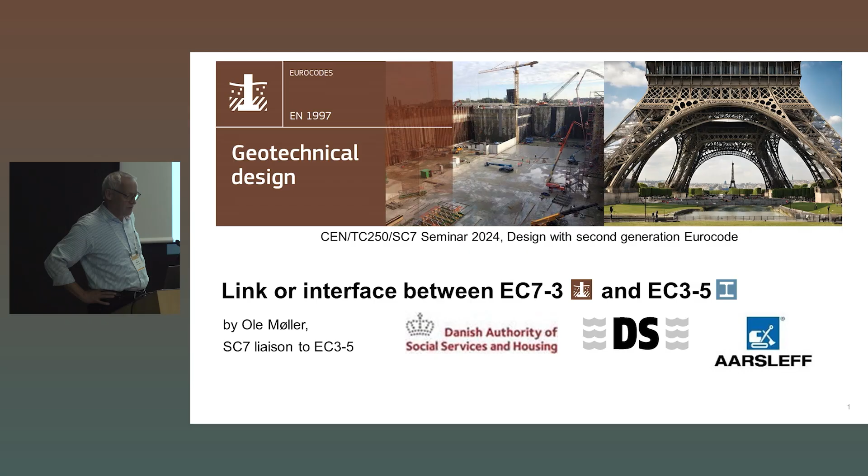Well, today's agenda, there are 4 points. I'll talk about the verification of rotation of sheet piles, and to me, a retaining structure is not finished. The design is not over until you have told the production what profile with what steel grade to use.

Similarly, if you do a pile design, you have to tell what is the concrete, what is the reinforcement in this pile, especially when we talk about piles in soft soils where there's an interaction between the soil and the structure, a buckling issue.

So you have to be involved with the material as well as the chemical matters. I'll speak a little bit about the corrosion issue, and the buckling is just mentioned here that the partly embedded piles, they are covered by Eurocode 3 Part 5. Partly embedded means that it is mainly subjected to bending, whereas the fully embedded piles are mostly subjected to compression. Buckling is not an issue for tension piles, as you probably know.

Lately we have these - well, I don't know the English word, we call it in Denmark Siamese twins. They're born in one piece and they were split into two. The rock bolts and the soil nails are now in 2 separate chapters.

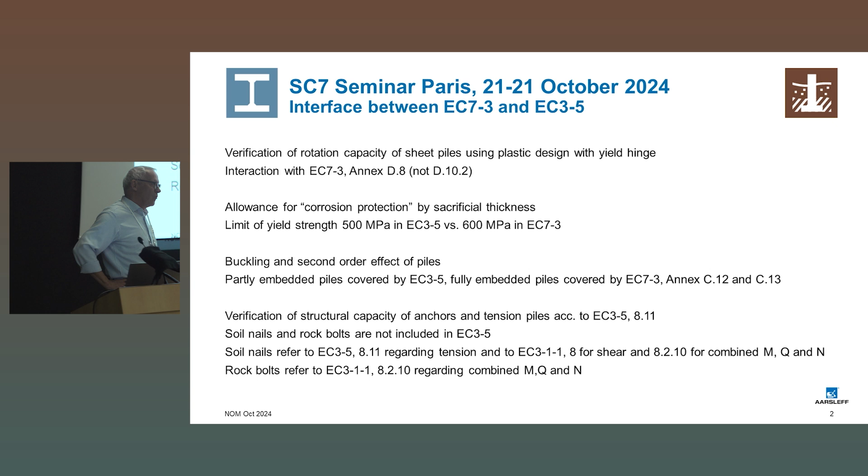And the rock bolts and soil nails are not included in Eurocode 3 Part 5. The steel people didn't want them. They are orphans. They're not part of a piling or retaining structure. So that was the main reason for the steel people not to involve them.

But that doesn't mean that the working groups in Eurocode 7 didn't have to refer to somewhere for how to document the steel. So Natalia and the group referred to Eurocode 3 Part 5 regarding the capacity of anchors and tension piles, to find the equations and rules how to do that. And I find it will work.

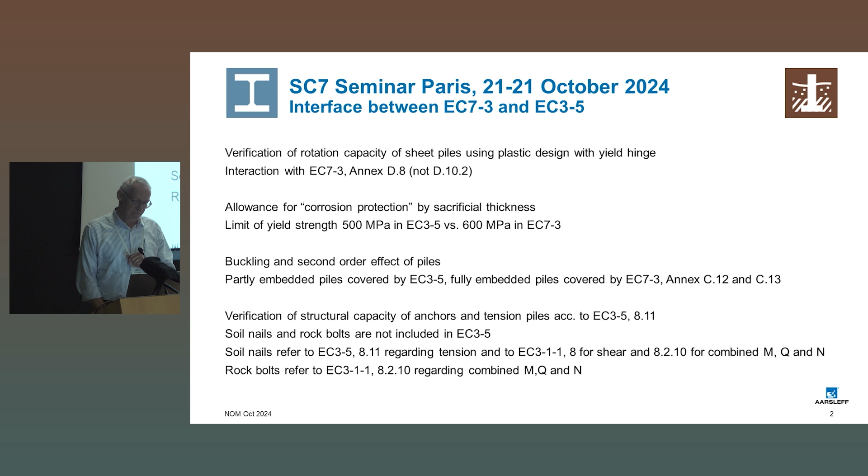Well, back to this verification matter. It's about rotation capacity, and it's the extra rotation beyond the elastic capacity which is interesting. So it's termed the total rotation minus the elastic rotation. The left-hand side concerns the geotechnical part, and the right-hand side concerns the structural part. But this verification principle is valid for any kind of retaining wall calculation.

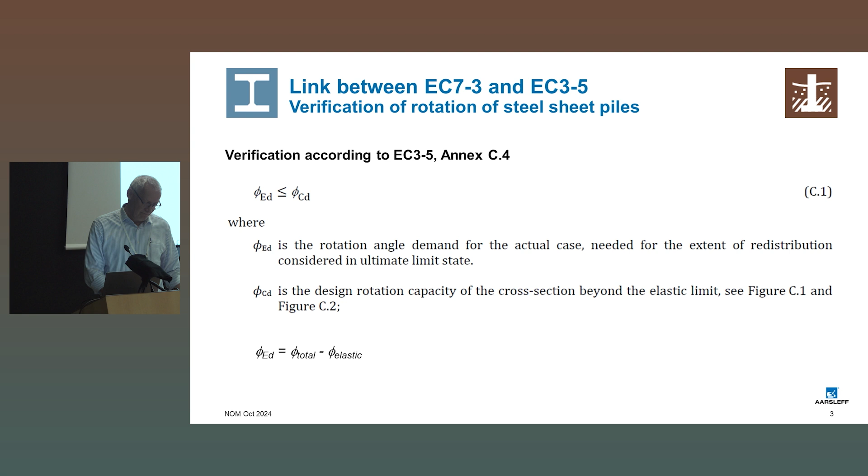Can I point with this? Okay, no, this is not a gamma, it's a Y for yield. It is the elastic rotation, considering the section to be pure elastic up to the semi-plastic limit. It's a trick - it's an approximation, but it makes the calculation easier.

And you see phi CD, that is the plastic capacity of the cross-section. So we have the elastic and the plastic. Reduction factor rho C depends on the relative slenderness of the flanges of the sheet pile profile, and it's experimentally determined.

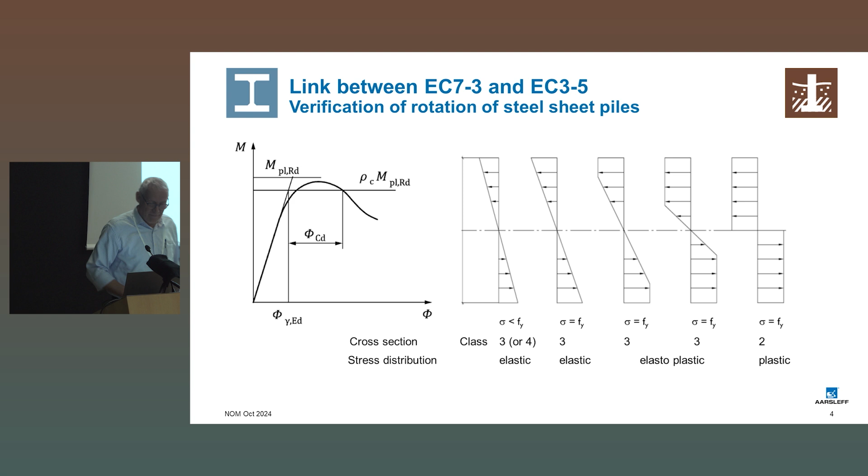You can also use a measure of how plastic it could be. We see here, cross section class 2 is pure plastic. Cross section 4 or 3 is pure elastic. But cross section 3 is actually everything else between pure plastic and pure elastic, and that's a trick to utilize. It's quite obvious that this profile here has rotated more than this here. That's the idea.

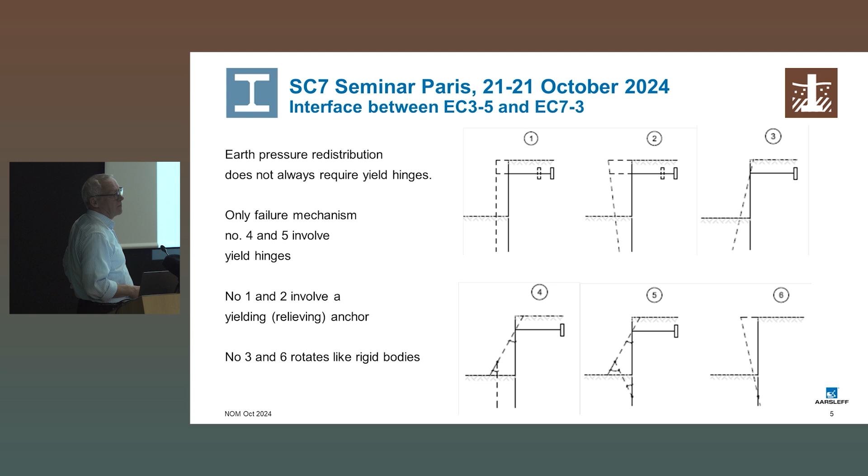Well, I'm talking about the LEM calculations - that's the limit equilibrium method, which anticipates pure active or passive earth pressure distribution. There may be an earth pressure redistribution, even if there's no yield hinge. Remember that a yield hinge is a hinge, but with full bending capacity.

But still, there might be a pressure jump. In number 1 and 2, it is the anchor, the steel, which yields, and the passive pressure in front of the dead man, or the concrete plate, which yields. And by this, allows for active and passive pressure to mobilize.

It's only in number 4 and 5 we actually have 1 yield hinge, and here maybe 2. Here it's rotating about the fixed anchor.

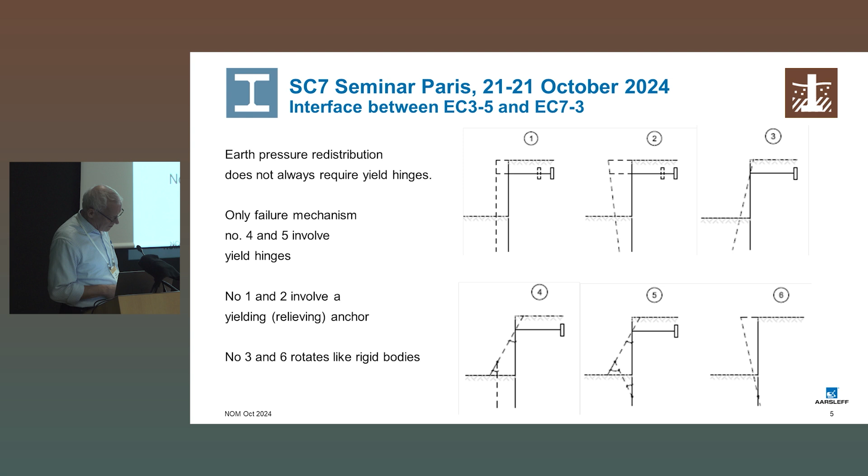The necessary rotation depends on the necessary displacement to mobilize plastic earth pressure. The question is how much displacement and rotation is needed. And here we have some guidance from Eurocode 7 Part 3.

The annex allows for national practice, but typically the mobilization - this ratio of movement compared to embedment depth - should be between 0.1 and 0.23% for the active pressure and 1 to 5% for the passive pressure. Typically, you need 10 times more displacement to mobilize passive pressure compared to the active pressure. It is quite recognized.

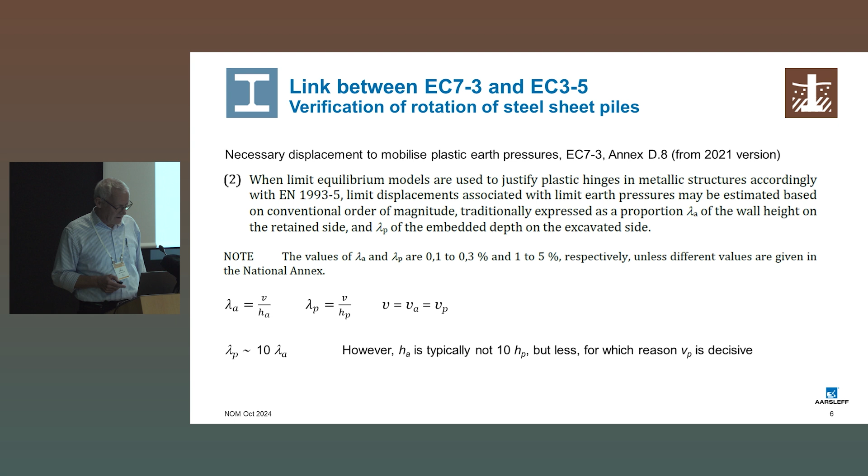Try to show it here. We have different wall heights. Of course, it's the same displacement, but they are giving different rates of displacement compared to the wall height.

But if we believe that the rate to mobilize the passive pressure is 10 times more than to mobilize the active pressure, well, then this lambda p will be most critical if the embedment is higher than 10% of the total height, which is very likely. So it's very often the passive side which is decisive.

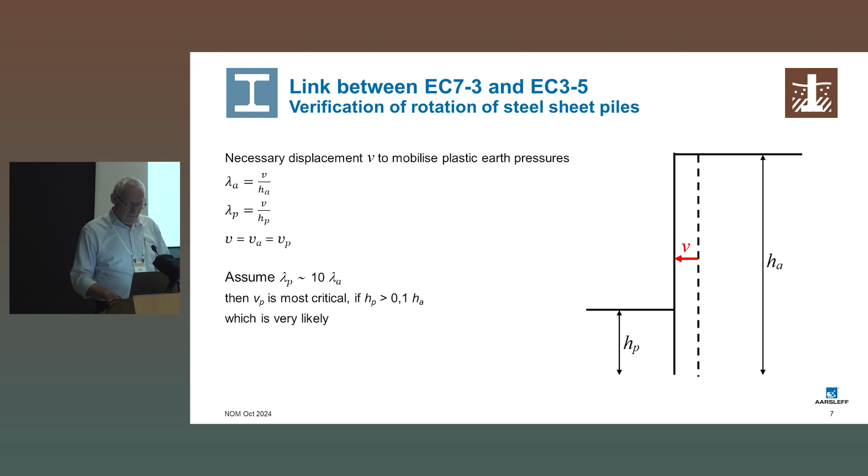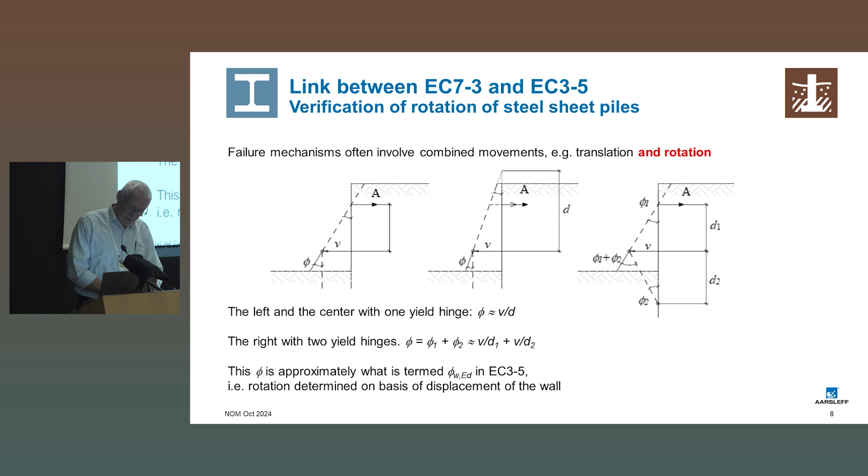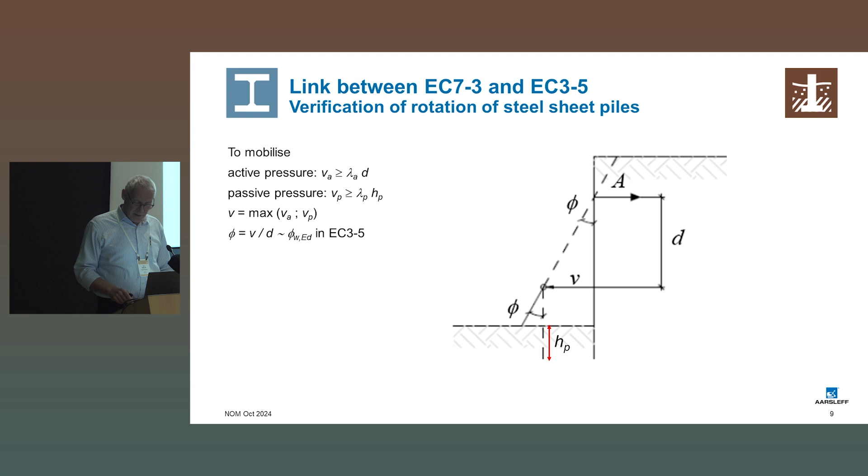Rotation, termed here, is typically, practically very close to the deformation divided by the height. This is what is termed phi WED in Eurocode 3.5. I'll show it on the next slide as well. Maybe I should just show the next slide, so you can compare it to what is stated in Eurocode 3.5.

These equations are stated in Eurocode 3.5, from C.4. You see that W1 is actually the displacement where the bending moment is 0. Same as W3, whereas W2 is the maximum displacement.

That's very close to... I made different calculations. It seems that if you compare it, if you take W1 as the deflection where the anchor point is, then that is 0. That's easier, and you get a small deviation, but it's very insignificant. So it's very easy to do so.

The formula for the elastic rotation is the exact solution for a simply supported beam with a uniform load, taken as an approximation for a sheet pile wall. But it's fairly good even if the load is triangular. It seems to get a very good result to use that.

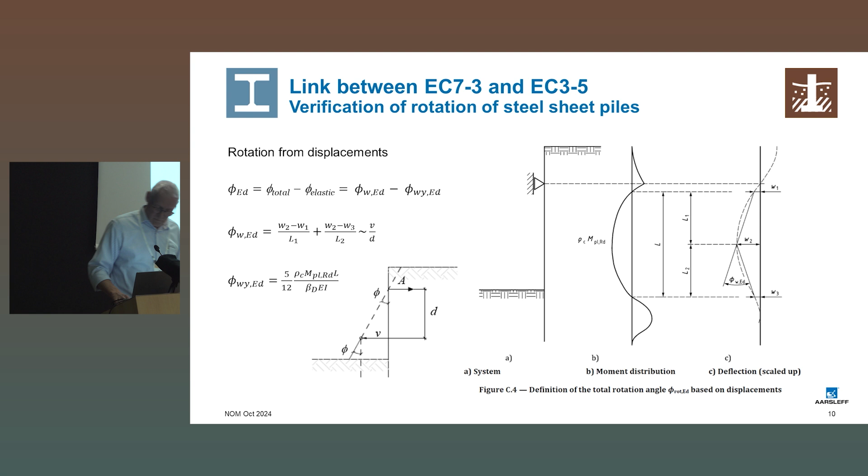I have to go back a little to explain the cross-section classes. This is a table from Eurocode 3.5, table 7.2. They have defined a kind of relative slenderness: the width of the flanges divided by the thickness of the flanges, weighted by a factor taking into consideration the yield stress of the steel compared to the minimum yield stress. So the higher the strength of steel, the higher the relative slenderness, and the more likelihood of buckling.

So when the pile buckles, it is the compression flange that buckles. Therefore, it's quite logical to use the term bf, the flange width divided by the thickness of the flange, as a measure of this.

For class 2 sections, they can be utilized to 100% plastic resistance. For class 3 sections, they can be used to 100% elastic, but anything between 60 and 35 is actually also class 3, and there we have the partial use of the plastic resistance. For U-piles, it's between 49 and 35.

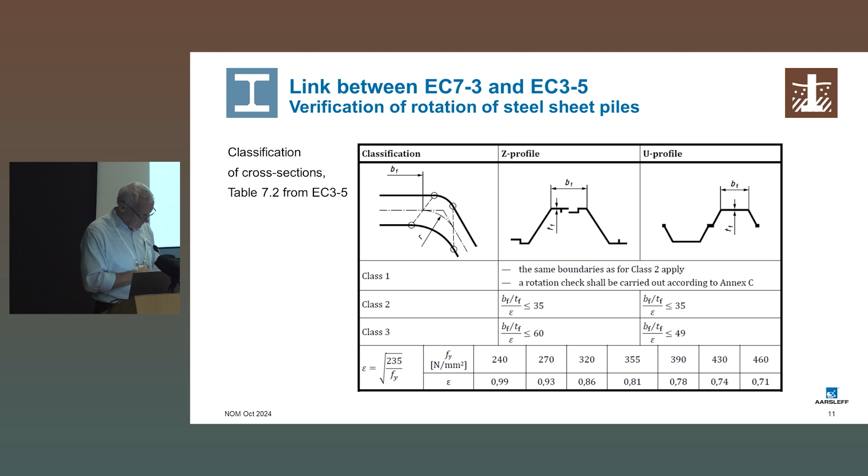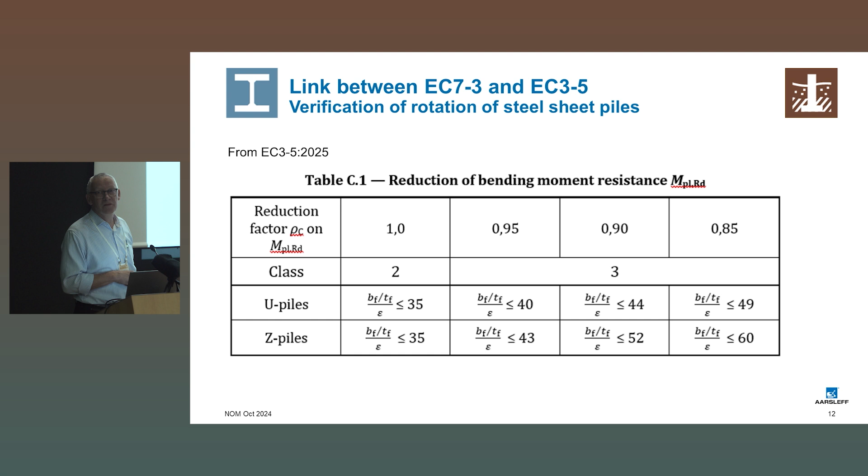Between these limits of 35, 60 and 49, U and Z pile bending tests have been carried out to determine this reduction factor. It is between 1.0 of course and 0.85. If you take a long row of sheet piles and compare the plastic modulus with the elastic modulus, it's very close to 0.85, so it's not a coincidence that this is the minimum value.

So if it's 0.85, that corresponds to a pure elastic cross-section.

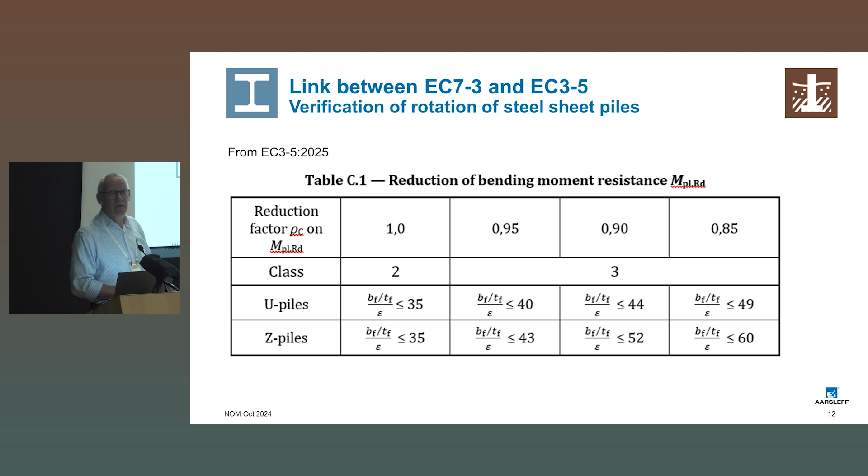This is just something from the background development of Eurocode 3.5 regarding this classification and also determination of the rotation capacity of the piles. It was carried out by subcommittee 3 and working group A, where I took part as a liaison officer. The people involved were Cecil Prim from ArcelorMittal, Dirk-Jan Peters from Royal HaskoningDHV, Colin Jacobs from Anker Schröder in the UK, and also a student, Alexander Enders from the Technical University in Stuttgart.

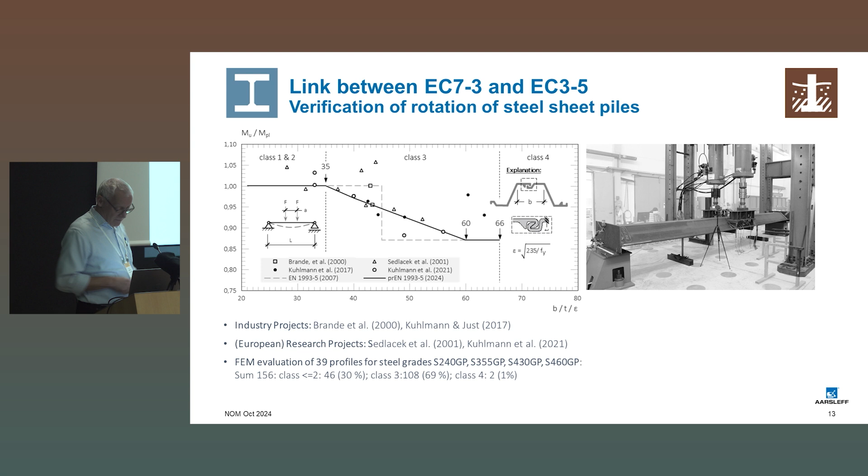The work of the research group led to diagrams to determine this rotation capacity from a given slenderness ratio, which I'll show you on the next slide. These diagrams are actually what is written in the current Eurocode 3.5, maybe with slightly changed limits, but it's the same structure of the figures.

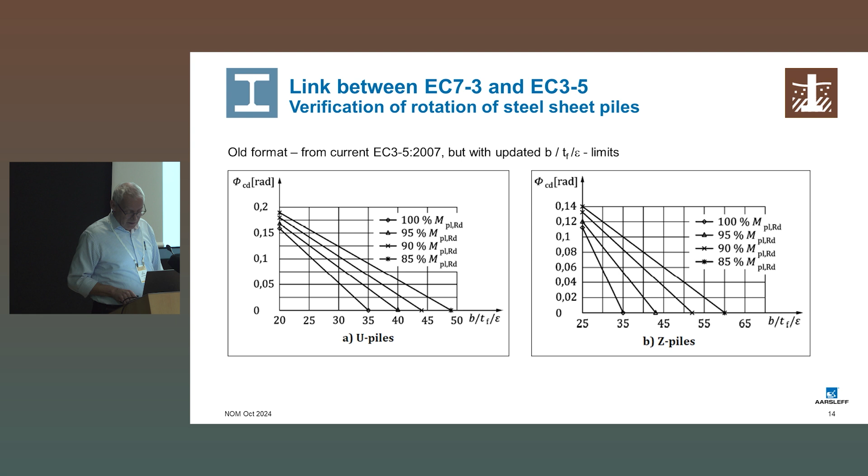However, this project team 13 prepared a new format of the figures, but based on exactly the same numbers. They did it for ease of use. Not ease of use to me, because I was used to these curves, but maybe they are right, as you'll see when I show it to you.

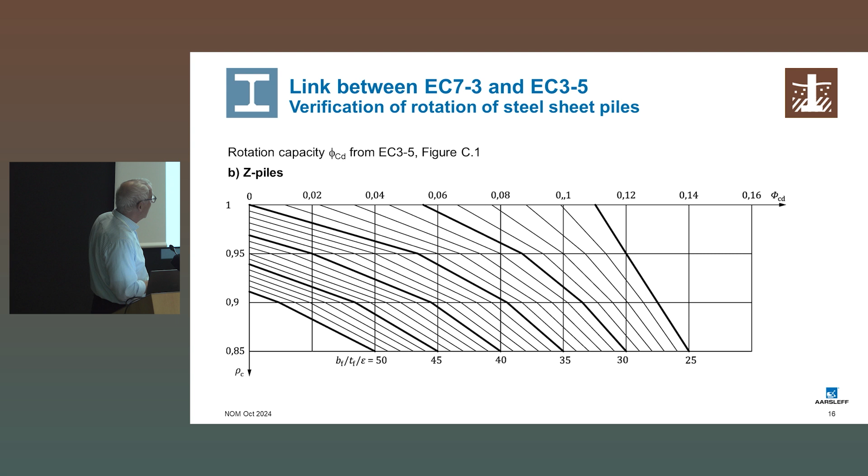There's also one for Z piles, a little different. The limit for pure plastic, class section class 2, is 35. So everything below 35 has a possible utilization of 100% of the plastic resistance. But when we go above 35 slenderness, it decreases.

Let's take a simple calculation example. It's a wall with one yield hinge. I used the Brinch Hansen theory, but it's not important which guru you use. What's important is that it's a limit equilibrium method for the plastic calculation.

There's a pressure jump just above the anchor, you can see it up here. There's a 5 meter differential water pressure. There's sand above the clay, and hydrostatic pressure, but we've disregarded the seepage here, so it's hydrostatic all the way.

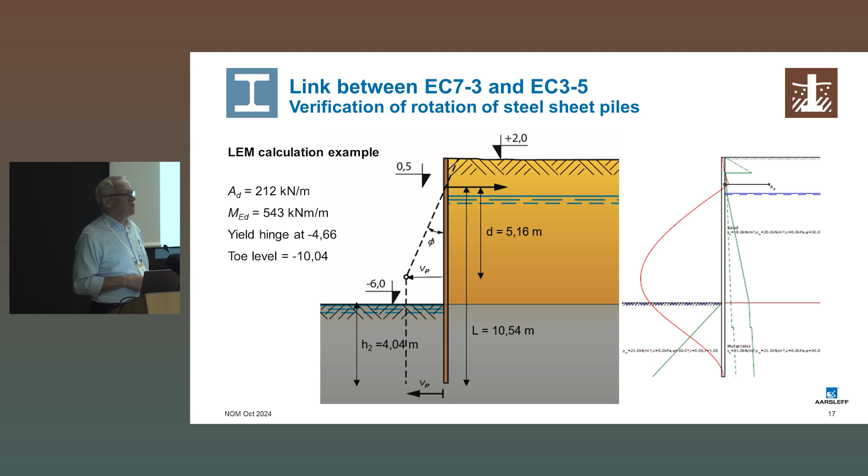This was done before we knew about the profile. But to check the rotation capacity, we have to investigate the profile. I chose an AZ 18-700, high steel quality, giving a slenderness ratio of, say, 45. Remember, 35 was class 2, but anything higher is class 3. So this is a class 3 cross section.

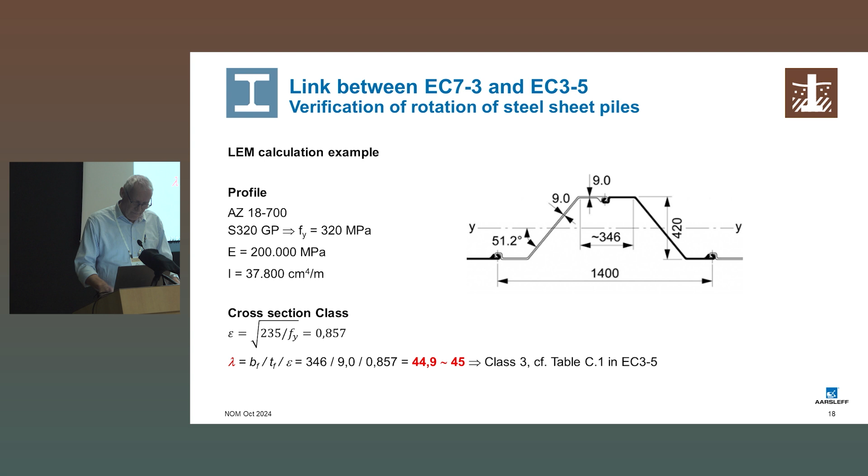If it's a Z profile, the beta values are 1. I've calculated the plastic and elastic bending resistance, using the Danish partial coefficient of 1.1, but that's not important. What's important is that the design bending moment is bigger than the elastic one, so we have to utilize some part of the plastic bending moment. That's necessary to use this profile.

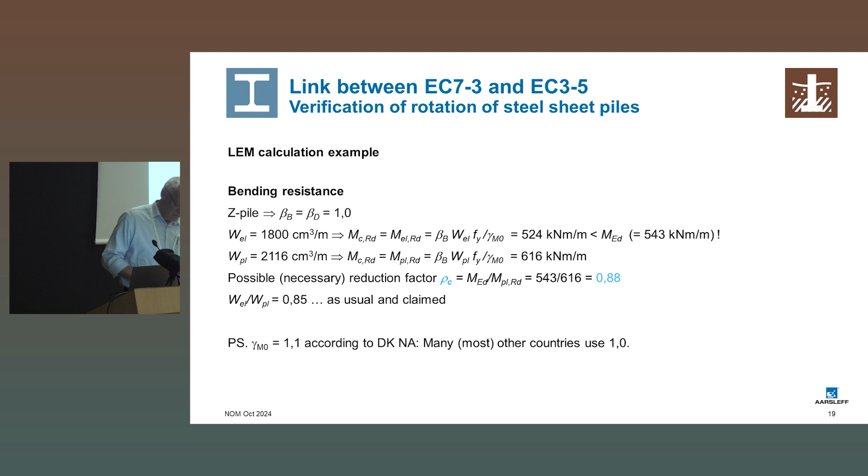I just took the ratio between these two, and it is, as stated before, 85%. Now the question is: is it possible to utilize 88%, which is needed here, of the plastic capacity? If we go in with a lambda value, the slenderness ratio of 45, at 88%, yes, it's possible, and we have a rotation capacity of say 0.045. Piece of cake.

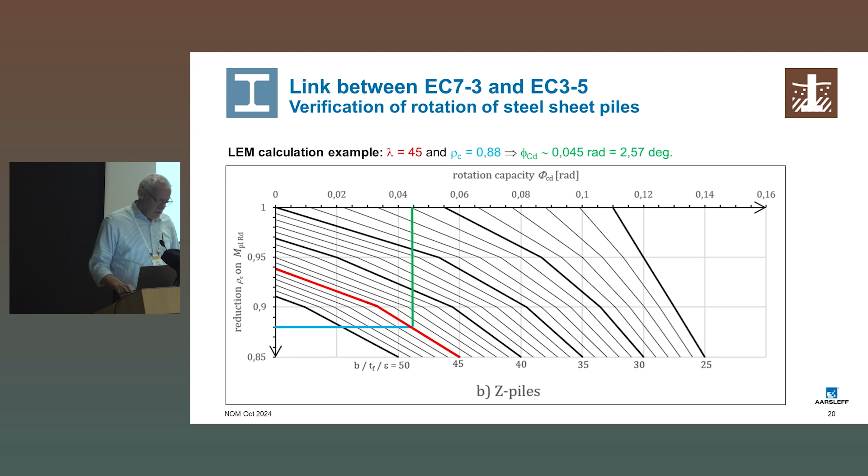You could also use the old format, the table. Then you interpolate between 85 and 90, to get 88% here. You go in with a lambda value of 45 and find exactly the same result. So the former graphic determination is okay compared to this one.

You have to be loyal to the model that you're working with.

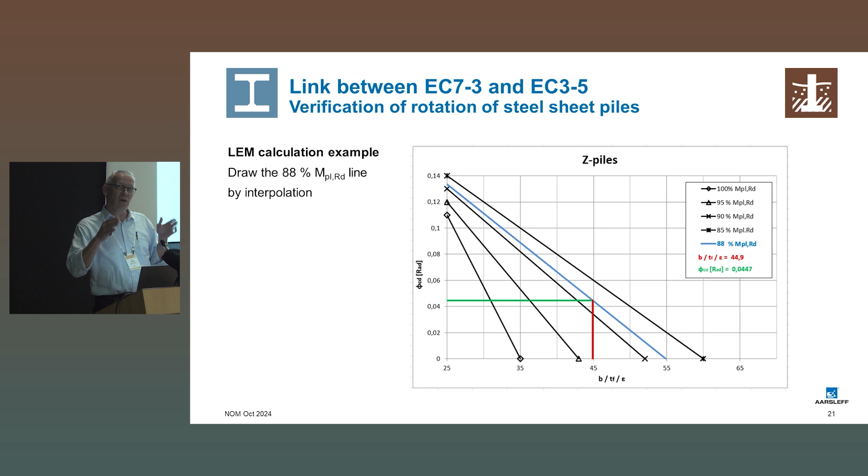Ole, are you still in time? Because I have 3 other subjects. Yeah, okay, I have 6. No, I have, there's 22. This is number 22, I have 26.

Okay, fine. Well, this is just to show the example. I guess this will be published afterwards.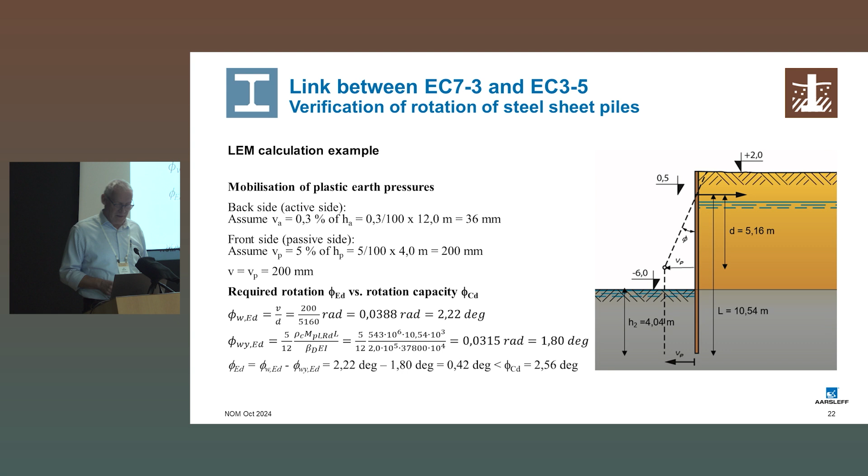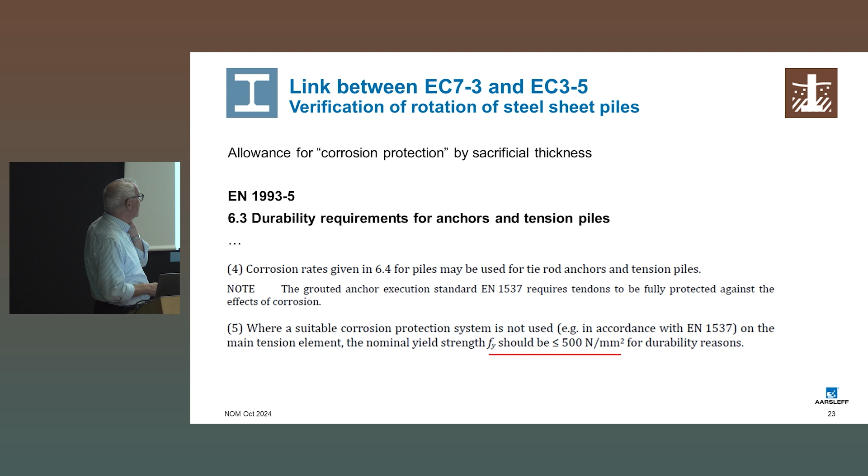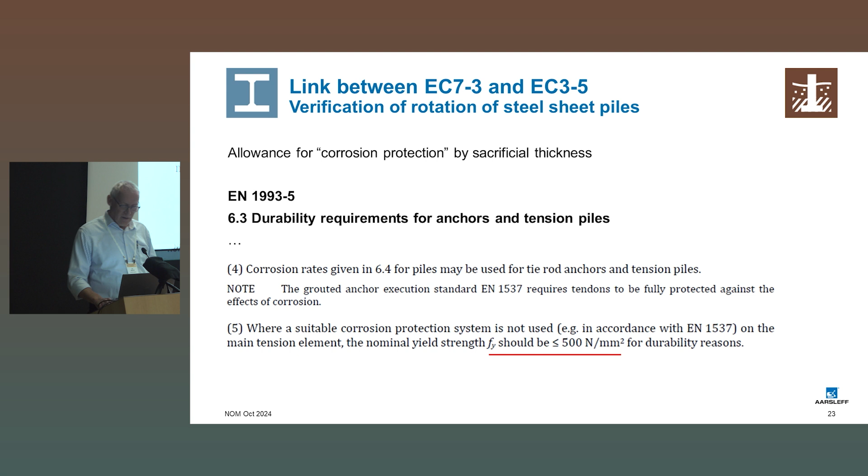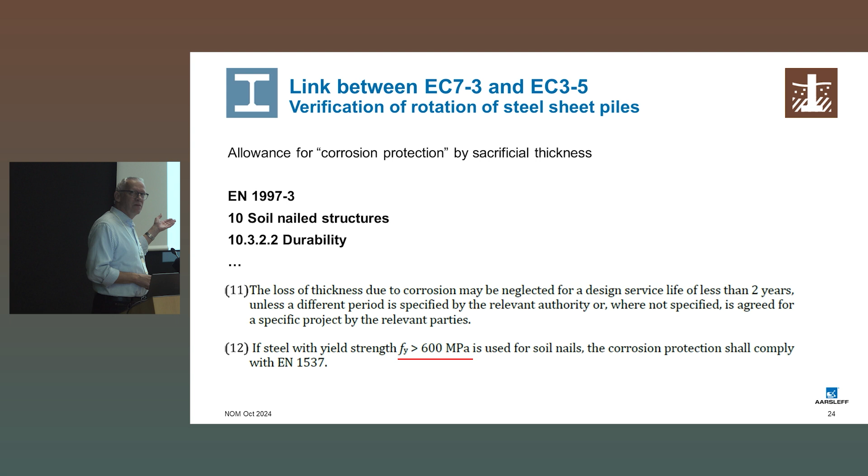Okay, then I'll go to this about the durability of anchors, which is written in Eurocode 3-5. There's a little bit different here. I think Natalia was also touching this in her presentation. The steel code says we have to be below 500 megapascals in order to use sacrificial thickness for corrosion protection. This has been changed in Eurocode 7 Part 3 to 600 megapascals. But I guess that's the free choice of the working groups in Eurocode 7. They can change it. I just want to make attention that there's a mismatch here, and it's the same for the rock bolts and the rock surface.